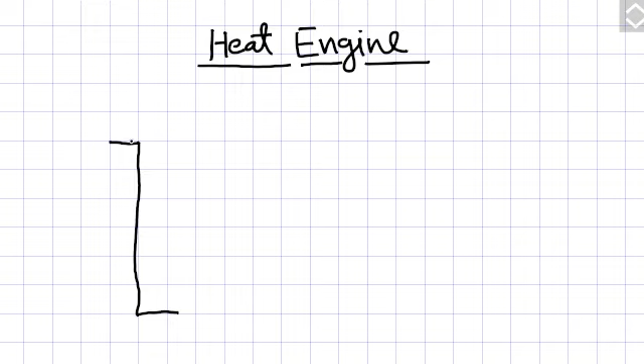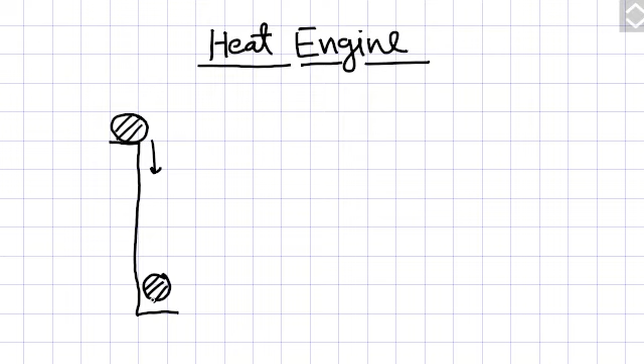In the last class we got some idea about the second law of thermodynamics. Suppose there is a stone here, and then it falls from here. When it strikes the ground it will have mechanical energy, that is kinetic energy, because of the velocity. After it has struck the ground and its velocity has come to zero, the kinetic energy goes inside the molecules and they start vibrating, and the temperature of the stone goes up. So we say that the kinetic energy has gone into the internal energy, or you can say it has converted into heat energy because the stone has heated up.

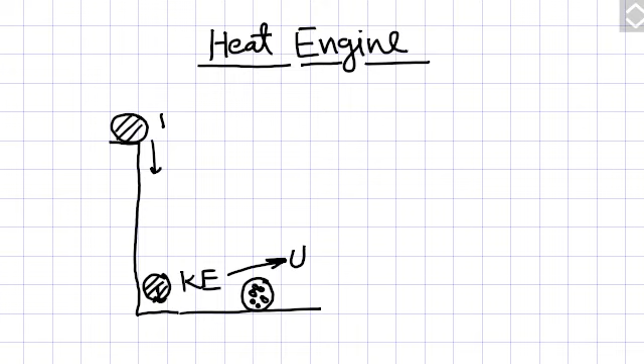So we were discussing that mechanical energy, that is kinetic energy or potential energy, these energies can be easily converted to heat energy, that is internal energy, with 100% efficiency. But if you want to convert this energy back into mechanical energy, it's difficult, because all the energy has gone inside the stone, but because of this energy the stone cannot go up again, because internal energy cannot change into potential energy or mechanical and kinetic energy. The reason is that all the molecules are vibrating in different directions.

In case of liquid, the molecules are actually moving. So if they are vibrating in different directions, this energy cannot be utilized to convert into mechanical energy.

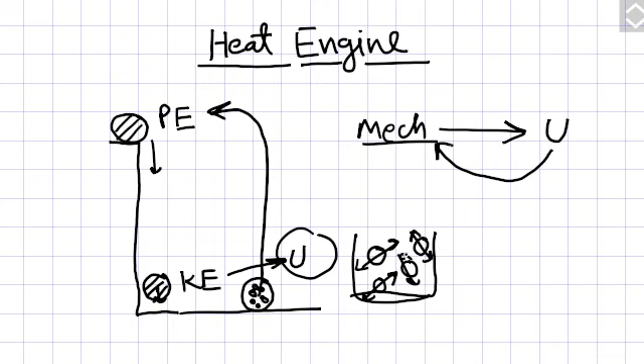So the second law is based upon all these things, and it has come from these kinds of situations. It says that heat energy cannot be converted into mechanical energy, or if it can be converted, then it cannot be converted with 100% efficiency. Some heat energy will be lost in that process. So all these things we will discuss in heat engines. The formulation of the second law has come from the study of heat engines.

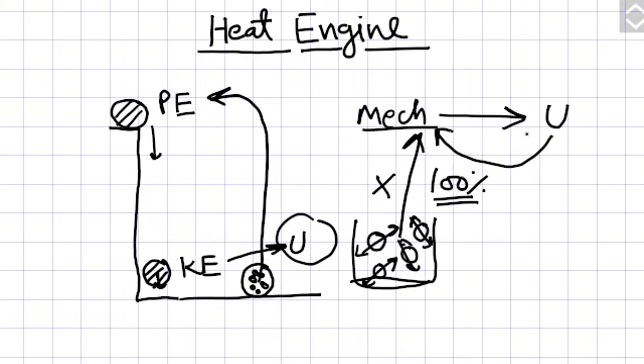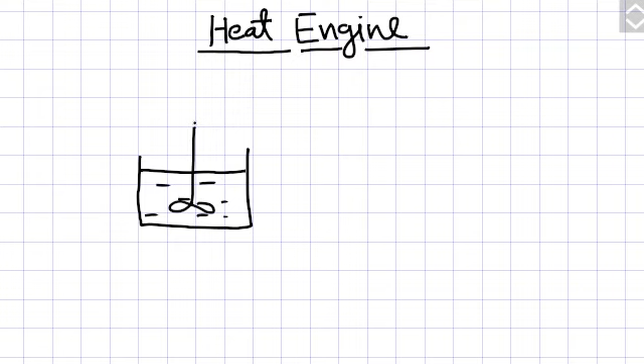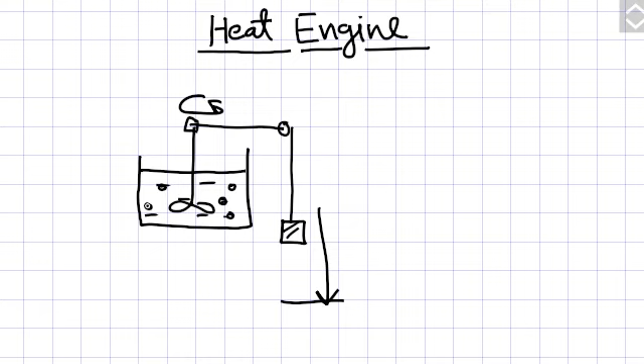Without going into detail, I will come to the topic, that is the heat engine. Let's start with an example. Suppose you have a vessel with water in it. This is actually Joule's experiment, and it has an agitator. There is a pulley here with a weight. You put some weight and it comes down and rotates, and its kinetic energy goes into the molecules, and they start moving with more velocity.

That is, the temperature of the water will go up. Suppose the temperature was 20 degrees centigrade when we started, then after the experiment it goes up to 30 degrees centigrade. So we saw that this mechanical energy could be converted into heat energy. But is it possible that if the water is at 30, 40, or 50 degrees centigrade, it can rotate this agitator and lift the weight up, or you can say heat energy can be converted into potential energy? We saw that it does not happen actually.

There is only one direction, that energy can only go into the molecules, but the backward direction is not possible, because molecules are moving in different directions. To rotate the agitator, they should have a specific velocity, then only they can rotate it. But it is not possible, because in nature everything, all molecules, are in a random state, moving in random directions. So this is actually the second law. It says that heat energy cannot be converted into mechanical energy, and if it can be converted, then all the heat energy cannot be converted into full mechanical energy.

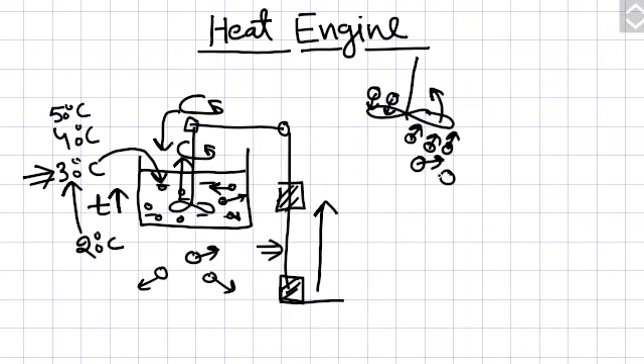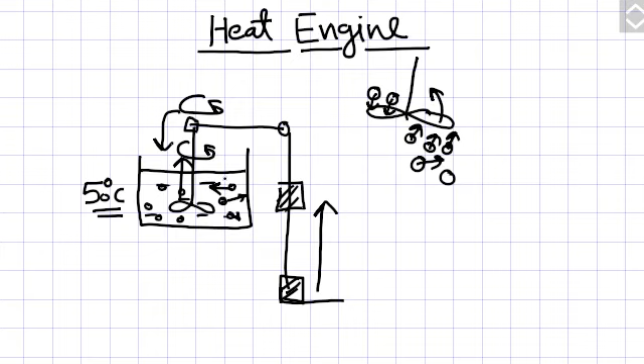So we will see now how to convert this heat energy - suppose the water is at some high temperature - and how we will convert this energy into mechanical energy, how we will rotate this machine. For that purpose, heat engines were invented.

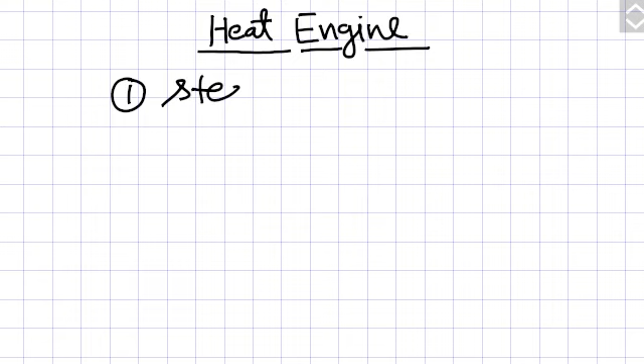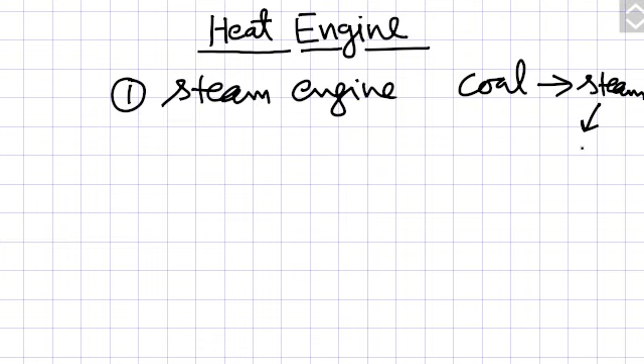The examples of heat engines: in old days there was the steam engine, in which coal was burnt and water was heated, and steam was generated, and this steam was used to move the engine and give it velocity. So this was mechanical energy. Nowadays you see in powerhouses, steam turbines are there, used to produce electricity.

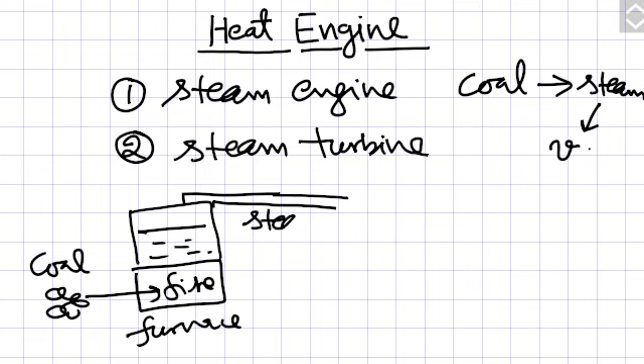The process is like this: there is a furnace, and coal is put here and burnt, producing fire. With the help of this fire, water is heated, water is there in this boiler, and high pressure steam is made, generated with the help of this heat, and then this steam goes into a turbine.

This is the turbine. There are blades in the turbine. These rotate because of the pressure of the steam, and this turns the generator and electricity is produced.

And the spent steam that is at low pressure is again condensed here. Cooling water from a river or something like that is put on this hot steam. This converts again into water, and this is again pumped into the boiler. So this way water circulates.

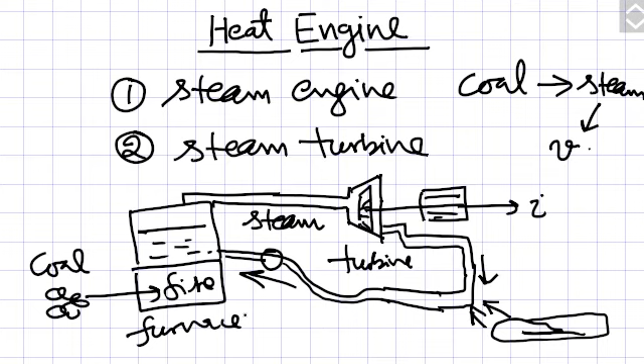So this is the working of a heat engine, and here you can see what equipments, additional equipments we had to use here, because suppose the water is at 100 degrees centigrade.

Suppose it is much higher temperature actually in the actual process. So this heat, that is the internal energy, to convert it into mechanical energy, you can see how much process, how many equipments like this turbine we have to use. Only then you can convert this heat energy.

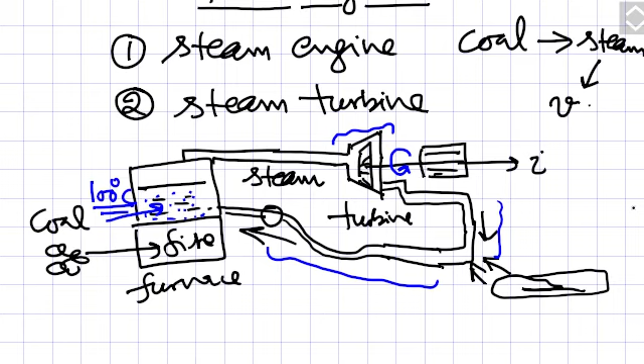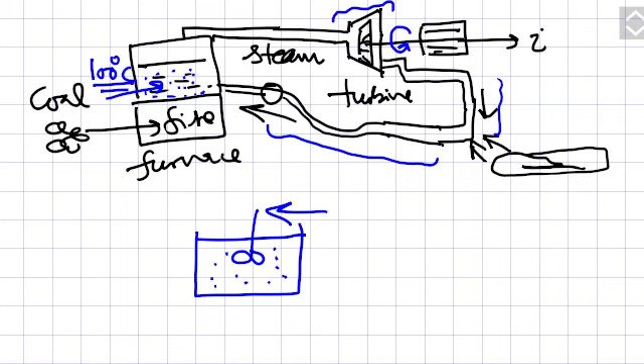So directly you cannot convert it. For example, in Joule's experiment, you can agitate water with mechanical energy, and directly you will get high temperature water. But this high temperature water cannot rotate this machine directly, so you will have to take this process.

Put this process. So for example, here with the help of this heat you need to generate steam, and with that steam you need to run the turbine, and that turbine will run this machine.

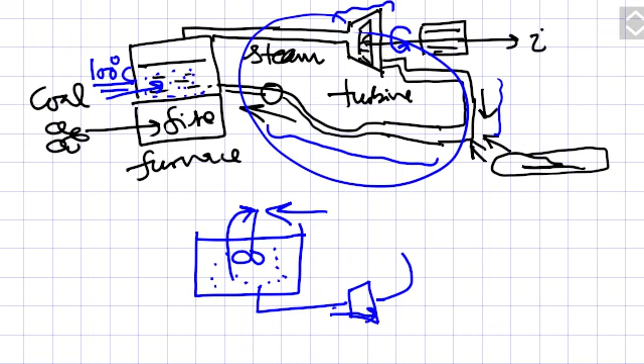So this is the process of heat engine, and now I will give you the language used in the heat engine, because that will be used in various expressions and proofs.

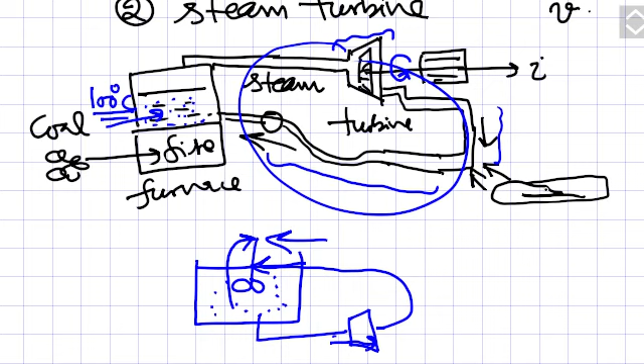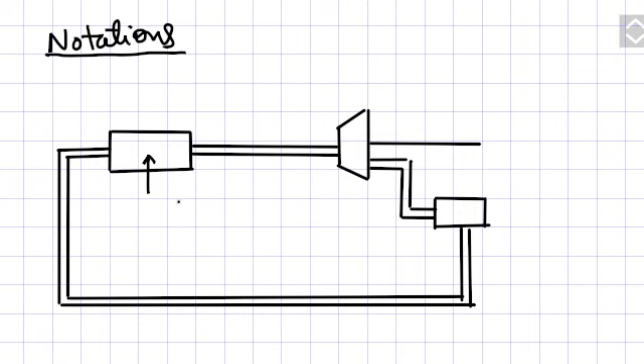So this is the figure, the schematic diagram of the heat engine, and here where you are burning your fuel, that is this furnace here. So you are giving heat to the water, and this heat is represented this way.

You put mod because it is only the numerical value and you are not showing the sign of it. So this is called the hot reservoir.

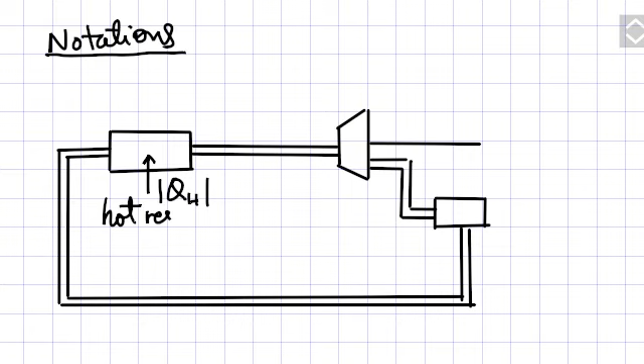From the hot reservoir you are taking heat QH and you are giving it to the water, and this is your turbine. Here you will take work, and work again you will show this way.

You are putting mod because you just learned that you have to put mod, since you are interested only in numerical value.

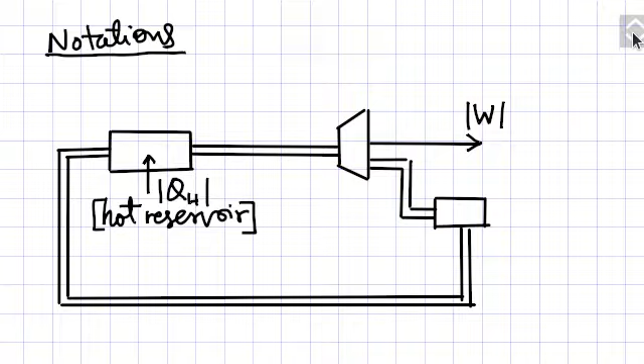Otherwise, if you follow the rules of thermodynamics that we discussed, then you will have to show the work this way if you are properly showing it, because work is positive when you are giving it to the system.

That's why we are not taking that convention, and we are showing it going outward, and showing its numerical value, that this much work is going out.

And the same way here, this is the condenser where this steam is converted into liquid water with the help of cold water from outside.

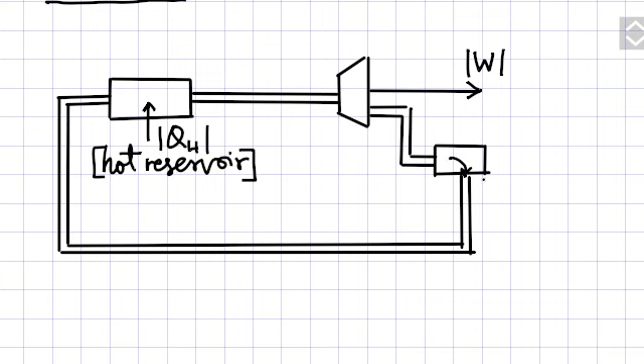So that is that. If you are giving the heat to the river, then that river will be called the cold reservoir.

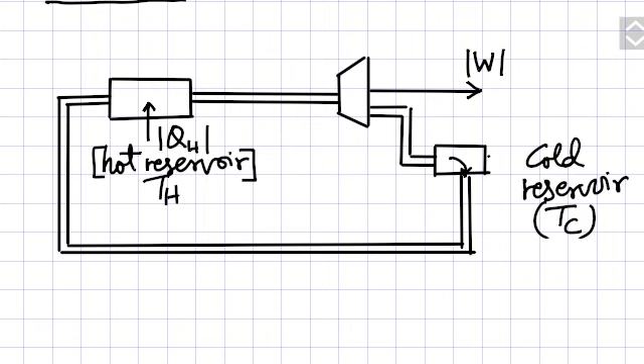And its temperature is shown this way, shown as TC. So this is all notation, and the heat is shown this way, going out, and this is shown this way: QC is the heat you are giving to the cold reservoir.

So QH is the heat absorbed, QC is the discarded heat, and W is the net work that you are getting from the system.

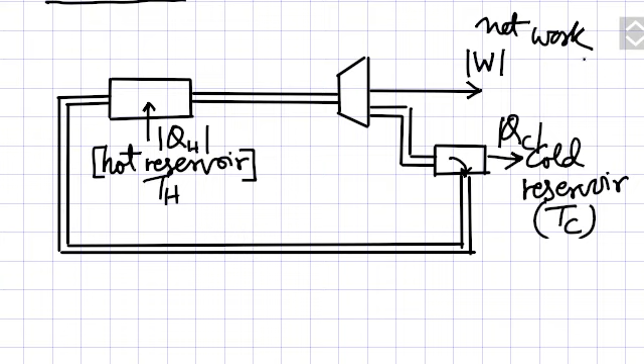Now when we are running our heat engine, what will we be most interested in? Because here you are burning your coal, and here you are getting your electricity.

So you will be interested in seeing how much coal you are burning and how much electricity you are getting out of that coal, or in mathematical terms, how much heat you are giving to the boiler and how much work you are getting out of it.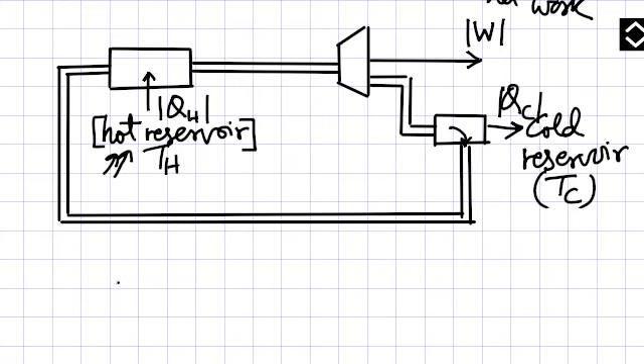So in other words, you are actually interested in the efficiency, or you can say thermal efficiency. The efficiency of this heat engine is called thermal efficiency. So I am writing it here, thermal efficiency,

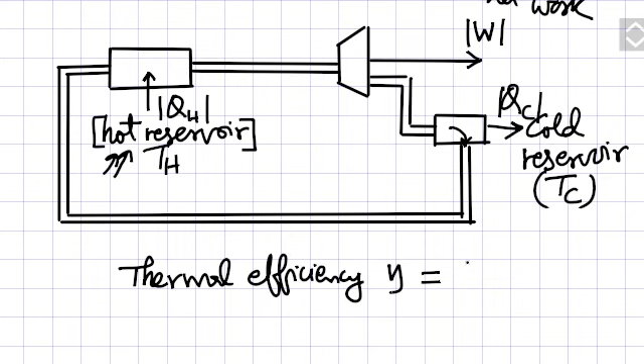and it is called eta, and it is W over... So now you can understand why we put mod here, because we are interested only in the numerical value. If we don't put mod here, then we will have to put the sign also of these quantities, but we are not interested in that even when calculating efficiency or something like that.

So anyway, just understand this formula: how much work you are getting when you are giving one unit of heat to the system.

So I will show you how we can develop the formula for that. Let's give it equation number 1. Now we will apply the first law of thermodynamics.

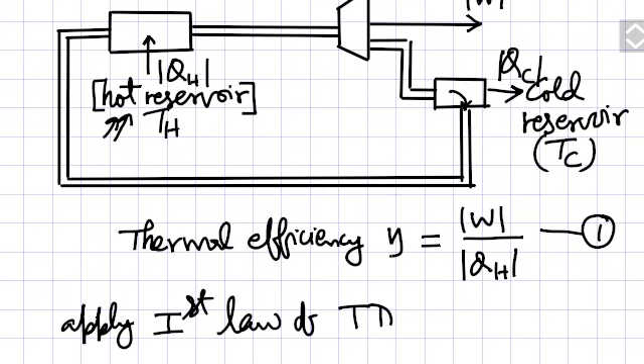Apply first law, and where it is to be applied, the system is this. So the law is applied on some mass of water. Suppose mass of water is here, 1 kg water is in the pipe, it goes into the boiler, and here this mass converts into steam, mass of steam.

And this steam, the same water, goes into the turbine, and here it gives you work, and then it comes out as low pressure steam, and then it goes to the condenser and again converts to water, this 1 kg water, and this water comes here, and then again it reaches the place where it started.

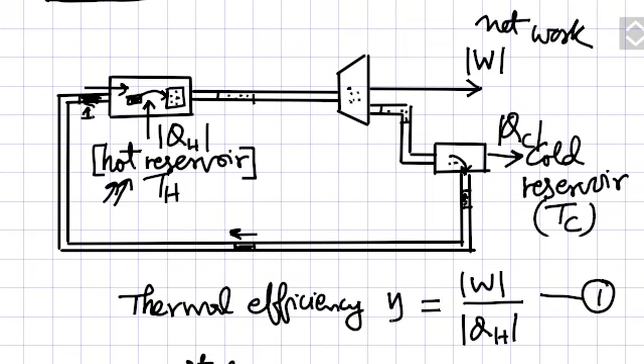Suppose I give it number 1. So this is where this completes the cyclic process. You can see this cycle is completed, that is the water has reached its initial state. So now we can apply this first law of thermodynamics to this 1 kg of water mass.

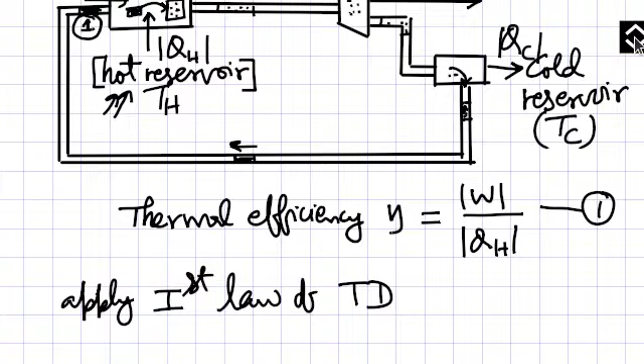So I am writing here the law, this Q plus W. Now because it is a cyclic process, suppose water is started at 25 degrees centigrade, it goes into this boiler, again here all the process, again it comes to 25 degrees centigrade. Its change in internal energy will be 0, because these kinds of energies are 0,

but there must be some heat or work kind of thing. So I am writing it here, this heat you are giving to the water, so it will be positive, and the heat that is taken out of water, it will be negative. If you don't show the mod sign, then you will have to write the formula this way, and then when you put numerical value of it, then you will put a minus sign with the numerical value. So to avoid that sign confusion, we have taken the mod value here and already put the sign here, and the same way we are putting this

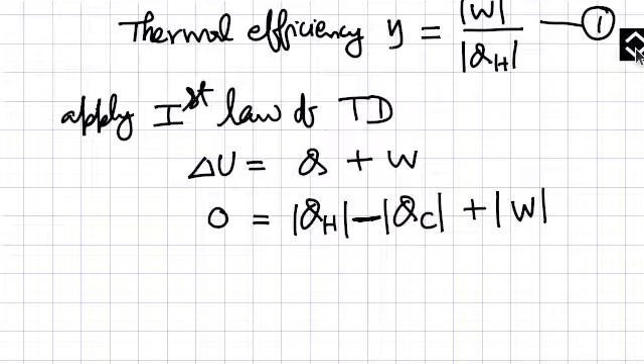for water, for work, and now work is equal to QH minus QC. So you can say this is the net heat given to water, because you are giving heat here to the water, and water is rejecting the heat, so the net heat that is given to the water is this Q, and it is minus, that's why it is here.

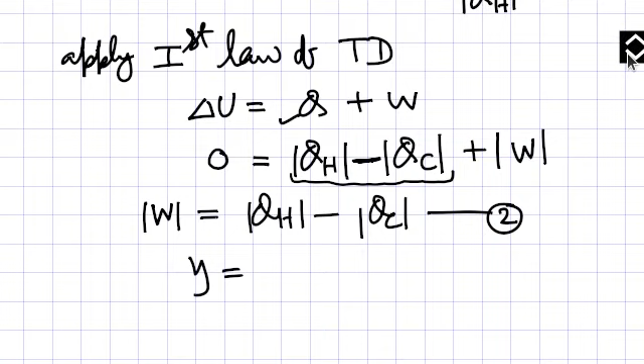So now, this is your equation number 2, and now in equation number 1, if you put this value of W, then what you will get? QH minus QC over QH, this kind of thing you will get, and then

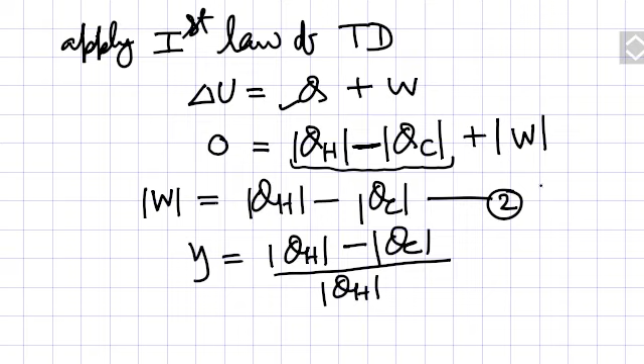efficiency formula you will get, 1 minus QC over QH. So this is the formula for efficiency for a heat engine.

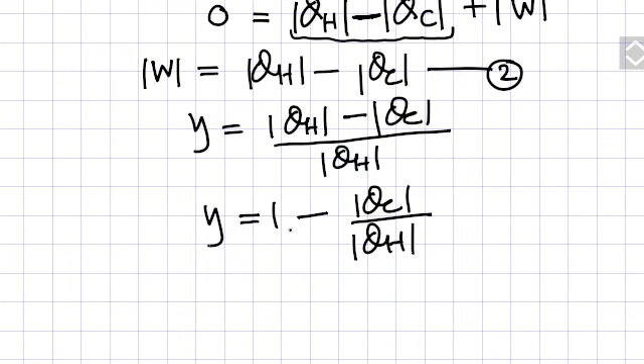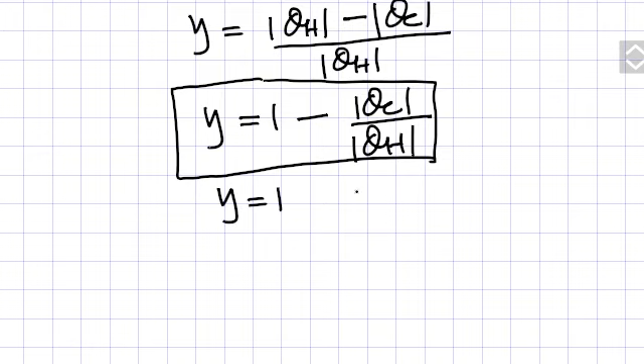So you can see that if you want the efficiency to be 1, that is 100% conversion of heat into mechanical energy, then you need this term to be 0. How can this term be 0? Either the heat that you give to the water is infinite, which is not possible, or the other possibility is that it is 0. So is it possible that you don't reject any heat?

If you don't reject any heat, if it is 0, then how will you convert this steam into water? And if you cannot convert this steam into water, then how will you feed this water into this boiler? So it is not possible.

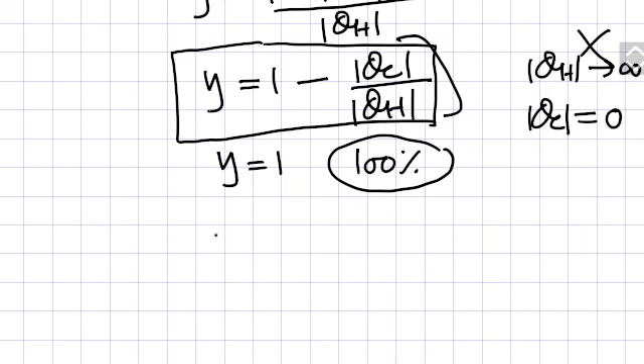So some heat you need to reject, and here comes the second law, that you cannot completely convert the heat into work. You need to discard some heat to the environment. This is the second law, and this is the efficiency formula.

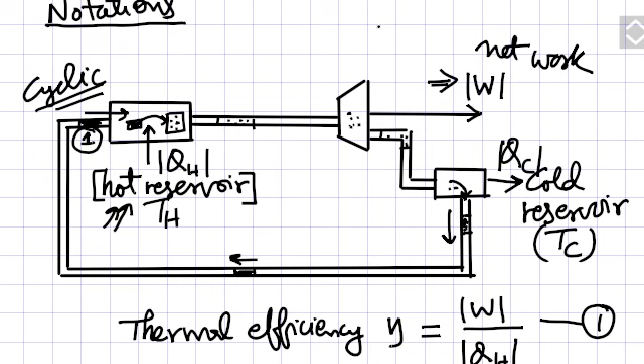Now, one thing I just noticed, I had put here this plus sign. Actually this should be negative. Why should this be negative? Because here you are giving the work out, you are taking the work out, and because of the convention of thermodynamics, the work that is given to the system is positive. So it means that if you are taking this work out, then this sign should be negative. That's why you can write this, then only this will come this way.

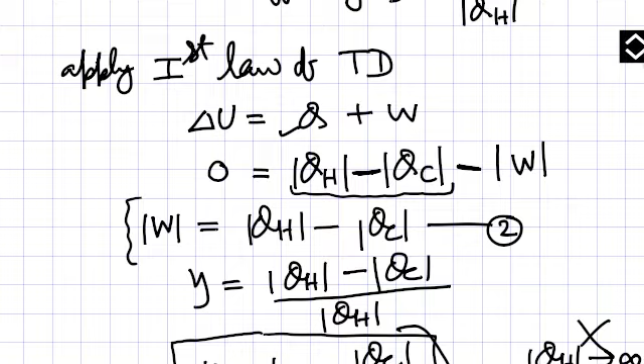So if this is making you confused, then you can understand it this way: the convention is that heat given to the system is positive, and work given to the system is positive. So if you are writing some values, if you are giving to the system 500 joule, and if you are taking out the heat 100 joule, and if you are taking out the work that is 400 joule,

so now you can see this: if you put it in this law, then you will see that you will put here 500 minus 100 and minus 400. So this is what this is describing, its numerical value. So I hope you can understand this this way.

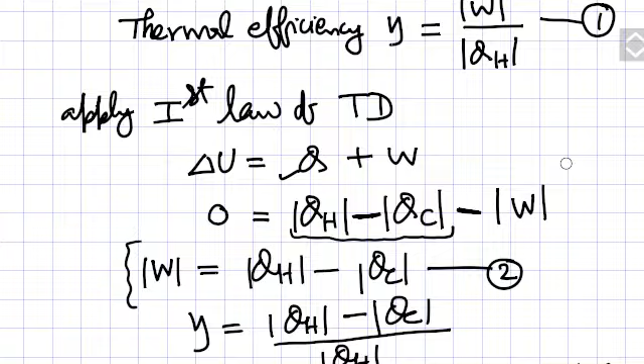So now we are going to that topic. Here you can see in your book the statements, after you have understood what is the concept of heat engine. You can now read the second law of thermodynamics.

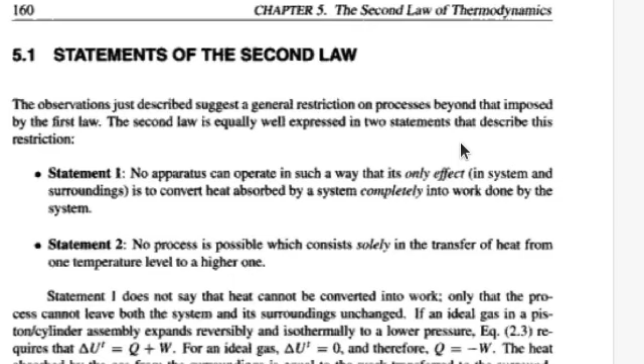So the statement is given as: Statement 1 is no apparatus can operate in such a way that its only effect is to convert heat absorbed by a system completely into work done by the system. That we just saw in our example of heat engine.

And second statement is no process is possible which consists solely in the transfer of heat from one temperature level to a higher one. So you cannot give heat from a lower temperature to a higher temperature, just in case of a refrigerator, which you can do only with the help of electricity, but there is no natural way to do that.

So you can see that these are just laws describing the direction. Just like when we started this class, we saw that a stone can fall down but it cannot go up. It is the same kind of thing: heat can flow from higher temperature to lower temperature, but not from lower temperature to higher temperature. So in a way, the second law of thermodynamics is giving you the idea of the direction in which a process can go.

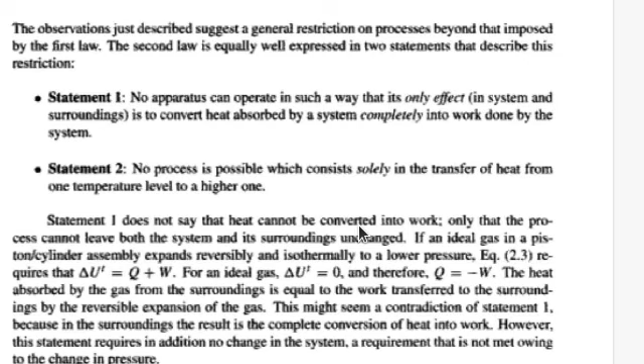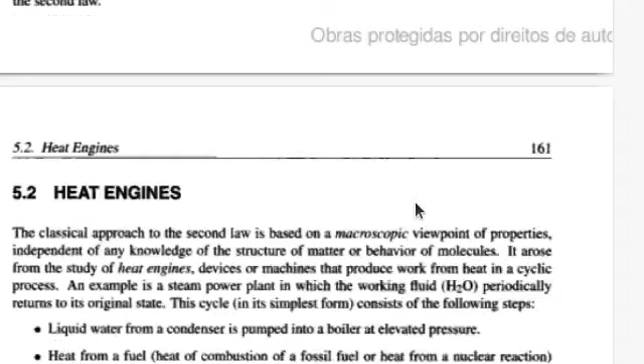So it defines the direction, and all these things you can read in your book. After you have understood these statements, then heat engine, that I described, efficiency of heat engine, and all these steps are given.

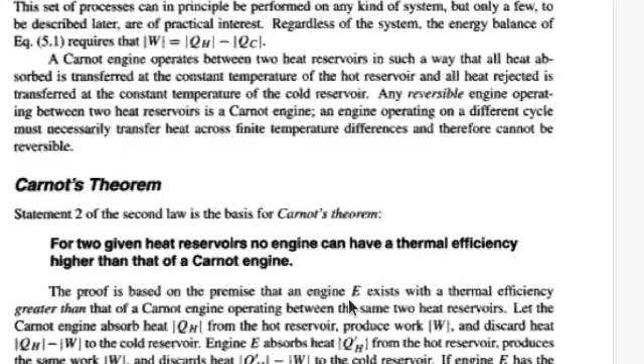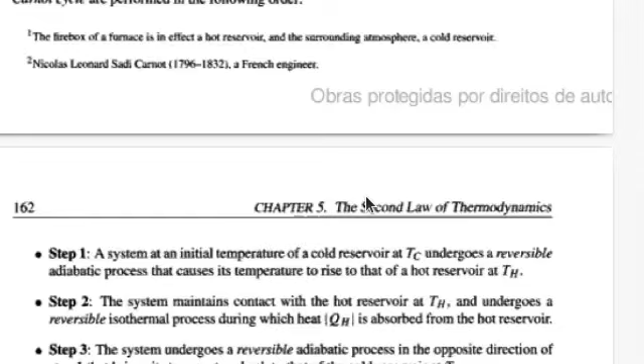And after that, this Carnot theorem is here, that is also in your syllabus, you can read it here. From here, what it is doing is defining the efficiency of heat engine, then Carnot theorem defines how much maximum efficiency is possible, whether it is 90%, 95%. So this Carnot theorem calculates or develops a formula for the maximum efficiency.

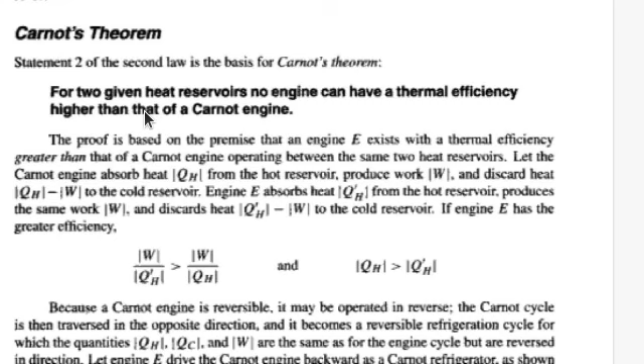For two given heat reservoirs, no heat engine can have a thermal efficiency higher than that of a Carnot engine. In simple language, this means the Carnot engine is the engine that works at maximum efficiency. This proof has been given here, you can read it, and they prove that no other engine can work more efficiently than the Carnot engine.

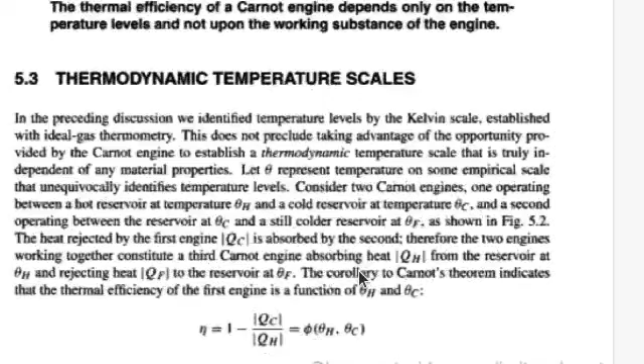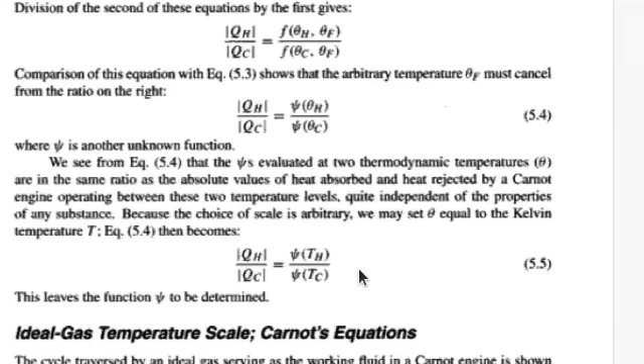And after that comes the thermodynamic temperature scale, which you don't need to go into detail about, because it would have to be explained in a very detailed manner. The only thing you need to understand is how the Carnot engine works.

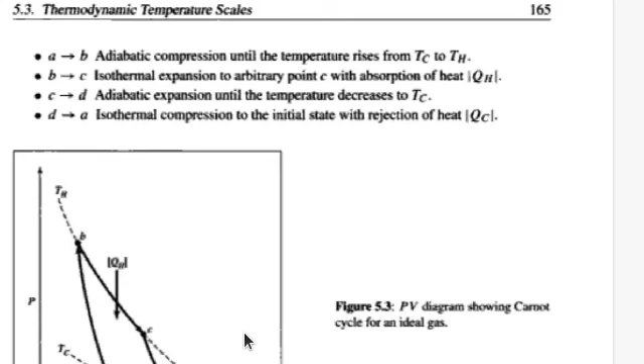This is how it works: in the PV diagram, a gas is taken and circulated in this way. Heat is given in this process and heat is taken out in this one, and these are the processes - adiabatic compression, that I discussed in earlier classes, and isothermal compression. These are the isotherms, and the gas circulates between these points.

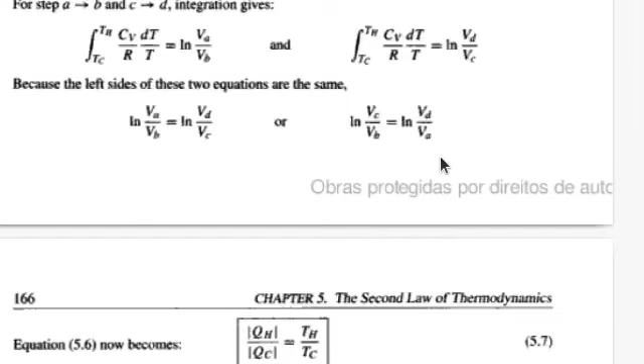Here you apply the formulas for isothermal and adiabatic processes. Based on those equations, there are 4 paths. On these 4 paths you apply different equations - for example, isothermal equation for this path, adiabatic equation for this path, adiabatic for this path also, and isothermal for this path. So you get 4 equations, then combine them to get this formula.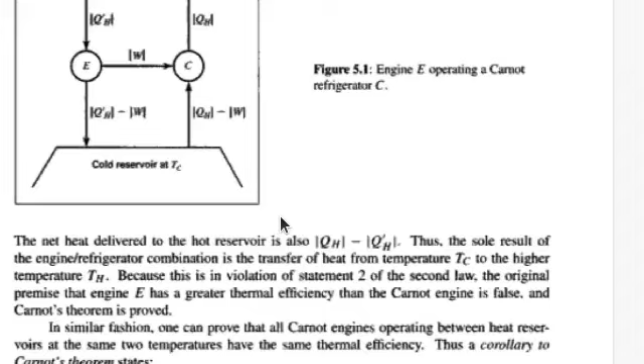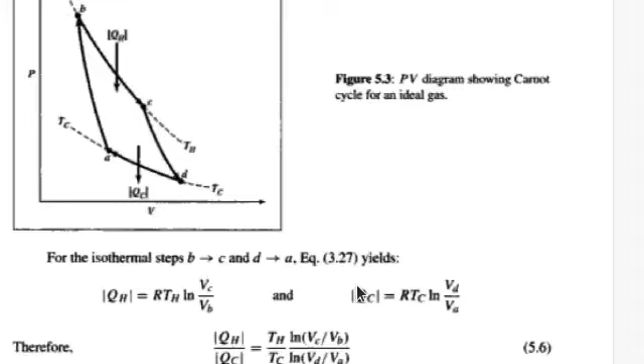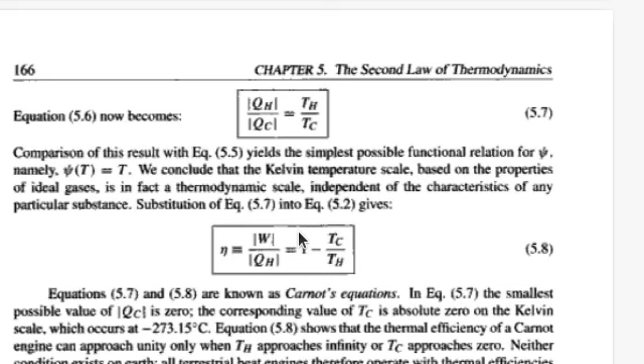And if you put this formula into the efficiency formula of the heat engine, you will find the efficiency formula comes out this way. When QC by QH appears, you find this is equal to the ratio of the temperatures, so you put this into the efficiency formula and get this result. Now you can relate efficiency directly to TC by TH. So this is your ultimate formula.

After that you can solve this problem: Example 5.1. All the data is given - TH is given, TC is given, maximum efficiency is given - then you have to find out how much heat is discarded to the river at the rated power.

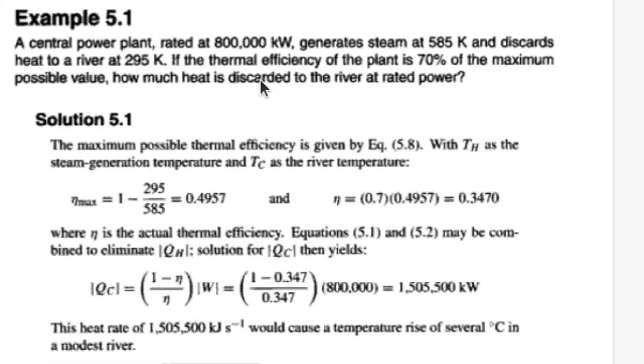And then in the next class I will go to entropy. Meanwhile you can read about this. I will explain what entropy is.

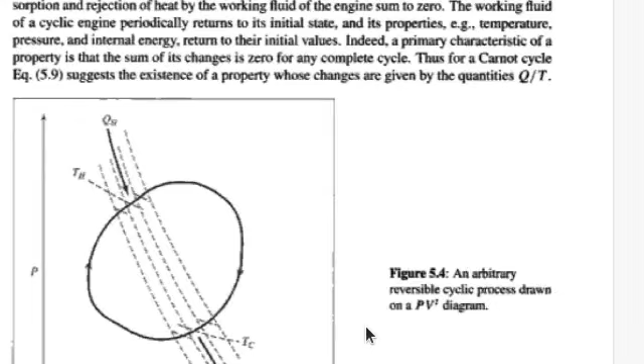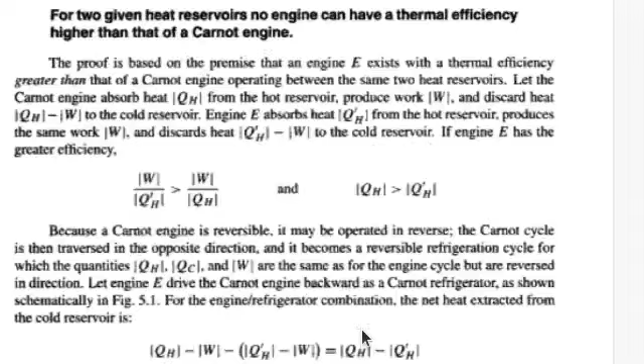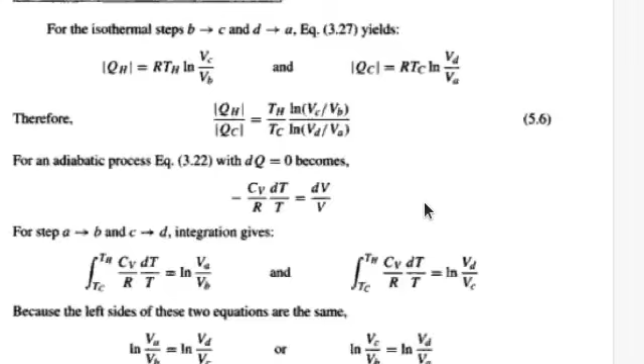So in today's class we finished the statement of the second law of thermodynamics, and explained heat engine and its efficiency, and then the Carnot engine, which is the maximum efficiency engine, and how it works. We saw how this engine works, and with the help of equations we proved this formula and then solved this numerical. So this is the work of today's class. Thank you very much.